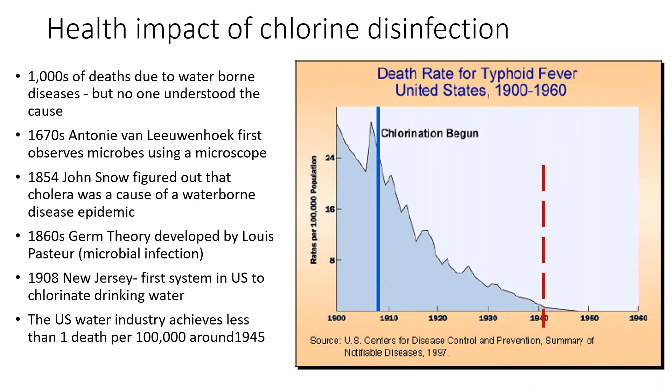In the 1860s, Louis Pasteur developed the germ theory, and that theory was that microorganisms such as bacteria and viruses are the primary causes of disease. And then in 1908, New Jersey installed the first system in the U.S. to chlorinate drinking water. So if we look at our chart here, in 1908 we were over 20, probably 25, 26 deaths per 100,000 people. And then you can see the decline in the years after that. In 1945, we achieved less than 1 death per 100,000 people. So it's important. Disinfection, chlorination, very important stuff in the water industry.

So when we look at the different bugs out there, the microorganisms, we consider them pathogens, and pathogens are disease-causing microorganisms: bacteria, viruses, parasites, things like that. They can contaminate our water supplies, and they make people sick and possibly even kill them. So that's why we need to disinfect and chlorinate.

We'll talk about coliform, and coliform is the total coliform testing that we do initially in our distribution system and at our plants. That's an indicator organism. Just because we have those doesn't mean that we have E. coli or fecal coliform, the things that are really dangerous. It doesn't necessarily mean that, but it means that we have an environment that is capable of sustaining that type of life.

So the presence of coliform may indicate that contamination has entered the water. It could be different things. It could be bacteria, viruses, protozoa. And E. coli is an MCL, a maximum contaminant level. There are violations for that under the revised total coliform rule.

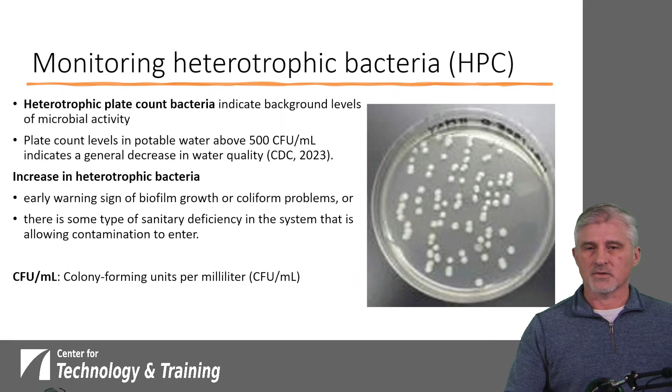And what could cause an increase in heterotrophic bacteria, or what does that increase signify? It could be an early warning sign that there is a problem out there. Could be biofilm growth. You would probably also want to look into it further as far as coliforms. Maybe there's something out in your distribution system or in your treatment that is allowing that contamination to enter, and so it signifies that maybe we need to look a little further into this as a potential problem.

And so what can we do as distribution system operators to protect our distribution system? The two most important things that we can do are maintain a positive water pressure. If we maintain positive water pressure, as Greg talked about, the opportunity for backflow or back siphonage is much less. And also, maintaining the physical integrity of the distribution system. If we don't have broken pipes, if we don't have leaks, once again, that helps with making sure that our distribution system is protected.

And then having a free chlorine residual, it's kind of a safety thing. It's a backup. It allows us to have a little bit of reassurance that if something like this were to happen in our system, hopefully that chlorine could act on any of the contaminated water that might enter through a hole in the pipe. But that's only going to take us so far. At some point, we'll use that chlorine up and we won't have any additional backup or safety remaining.

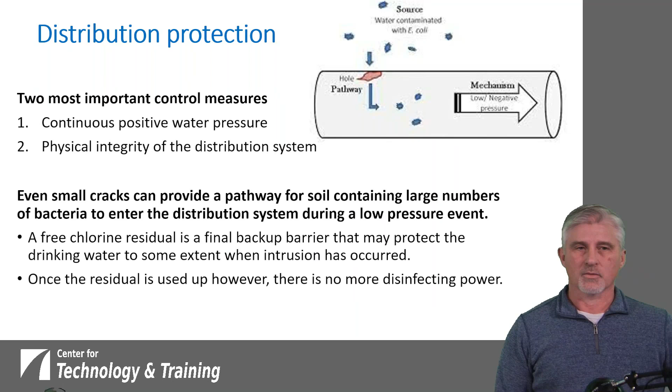All right, so we're into our first poll already. Which of the following could indicate that contamination may have entered the drinking water system? A, increase in heterotrophic plate count bacteria. B, the presence of coliform bacteria. C, decrease in disinfection residual. Or D, all of the above.

All right, it looks like the majority of people have gotten their answers in, but I'll give everyone just a couple more seconds to get those answers in before I close the poll. All right, closing the poll in 3, 2, 1. All right, Daryl, so the majority of people at 88% said D, all of the above. All right, thank you, Kristen.

Yes, D, all of the above is the correct answer. We can explain that through A and B, the increase in HPC count and the presence of coliform bacteria. We indicated that both of those things are indicators of potential issues in the distribution system in the water. And then a decrease in disinfection residual could mean that our chlorine is working on some bugs that were introduced into the system. So all of the above would be the correct answer.

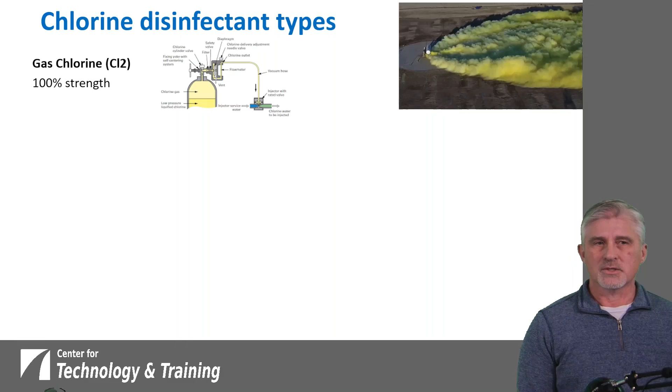There are some issues with chlorine gas. It can be very dangerous. You see here a chlorine gas plume. Everything around there will be dead. Chlorine is a powerful oxidizer, and anything organic is going to be pretty much killed.

So one of the reasons that more systems don't use that is because there's a bunch of regulations that are involved with operating gas chlorine. It's a safety thing. Some communities don't even want to consider it. So it's a great way to chlorinate, but it comes with its downsides.

Liquid chlorine or sodium hypochlorite is probably the most common. It's the simplest. It's already in a liquid form. We're trying to add this to water, so it already is in a liquid, so it's easy to mix. But you'll note that the concentrations are lower. The concentrations will decrease through time a little faster than they will for gas, or for the solid, which is

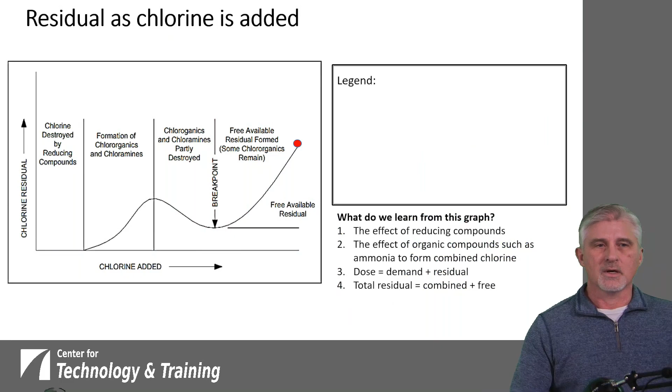So as we go along, on the bottom we're adding chlorine, and on the side we're seeing what the result is in chlorine residual. So initially, if we're starting out and we're adding chlorine at a well, say, and we're looking for what our residuals are, initially we're going to add chlorine and we're not going to really see anything. The chlorine is destroyed by reducing compounds that are in the water initially. So we'll add chlorine and nothing seems to happen as far as the residual goes.

And then as we continue to add, we start to see this curve and it goes up. And during that, we're forming chlororganics and chloramines. And these are the things that give us the odors, the chlorine odor. Taste and odor concerns come out of this. And so we're adding chlorine and we're just getting more of the stuff we don't want. And so we get complaints. And so as a state regulator, I would go out to systems and I'd tell them, you need to increase your chlorine residual.

And they'd be like, well, you know, we do that and we just get more complaints. And so they're hesitant to do that. But the part that they weren't understanding is that we need to keep that process going. And so as we get through that, we produce those chloramines, and then we get to the next stage where that chlorine is going to destroy those chloramines. And so we see a drop in our chlorine residual as we continue to add chlorine.

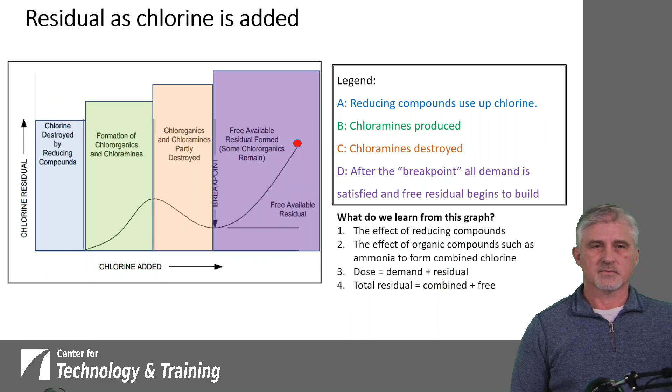So that kind of is a little better depicted here. Total residual is equal to the free residual and the combined. All right, so in this instance, we have 0.2 parts per million. That's what it takes for the chlorine to use up those reducing compounds in this example. And then on top of that, we have 0.3 parts per million of combined chlorine. And so those two together result in a half a part per million of total demand.

And then in this instance, we might have another 1 part per million of free chlorine residual on top of that. And so our chlorine dosage, in order to achieve 1 part per million, we need to apply 1.5 parts per million to get to that point, because 0.2 is used up by reducing compounds, 0.3 is combined. So that requires 1.5 to get to our free chlorine residual goal of 1 part per million. So our dosage is equal to the free residual plus the demand. Now the demand is made up of both what's used for the reducing compound and the combined chlorine.

So now we are on to poll number 2. What dosage should be applied to drinking water with a total demand of 0.4 parts per million if the intended free residual is 1.2 parts per million?

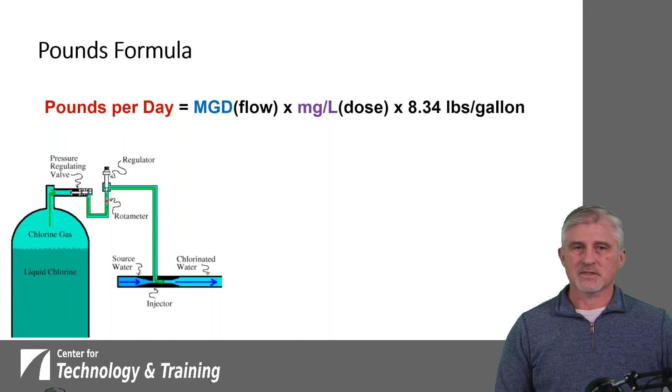And this shows what gas chlorine might look like, some of the components. This is the rotameter here. And the rotameter provides us units in pounds per day. So this is a setting. So we need to know how many pounds we need in order to set this rotameter so that it applies the right amount. So we need to figure that out. So we use the pounds formula to do that.

So we've got an example where the question is, what is the feed rate setting for gas chlorine in pounds per day if the plant flow is 1.2 million gallons a day and the required dosage concentration is 1.5 parts per million?

So to solve this, we're gonna plug that 1.2 mgd in for the flow, and then we'll take the concentration of 1.5 parts per million, and we're gonna put them into our equation for our pounds formula. If we do that, it tells us that it's going to take 15 pounds per day for us to have a dosage of 1.5 parts per million with our flow of 1.2 million gallons a day.

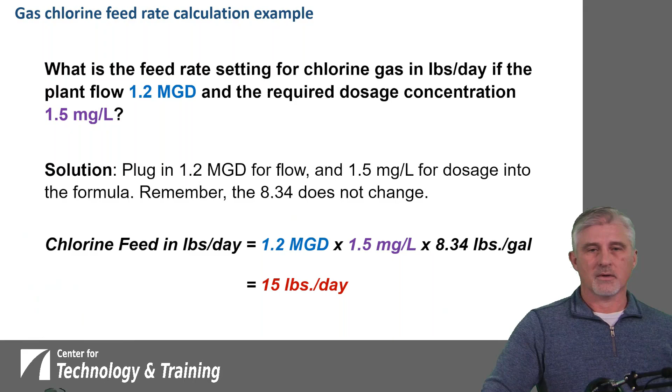Now for sodium hypochlorite, for liquid chlorine, it's a little different. It's different because the concentration isn't 100%. For gas chlorine, it's a much simpler calculation because we're using 100% strength. So we have to take into consideration for liquid chlorine the fact that it isn't 100%. The top part of the equation is just determining the pure chlorine, just as if it were gas chlorine.

Now we'll divide by the percent strength to take that into account, and that gives us the weight of sodium hypochlorite liquid actually needed. And then we also need to divide by the weight per gallon, and that's going to give us the number of gallons that we need per day. We could do it in pounds. Some people operate in pounds because then they have scales and they can do it that way, but most people are going to want to know how many gallons of liquid chlorine they need to apply. So that's what we put into the formula in order to take that into account.

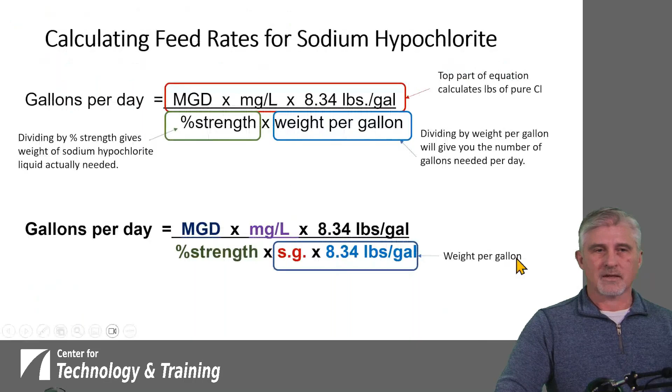So then our formula becomes the gallons per day is equal to the million gallons a day times the concentration times 8.34 pounds per gallon. And then we divide by that percent strength, and we multiply by the specific gravity. So the specific gravity is the comparison of a liquid to the weight of water. So we compare those two, and then we multiply that by 8.34 pounds per gallon. So that gives us the weight per gallon there. So let's look at an example of that and use our formula.

What is the feed rate for 12.5% sodium hypochlorite with a specific gravity of 1.2 when the plant flow is 500,000 gallons a day and the dosage is 0.9 parts per million? Now keep in mind, specific gravity is a comparison to water. So water is 1. If it has a specific gravity of 1.2, that means that liquid chlorine is heavier than water. If it was less than 1, it would mean that it was lighter than water.

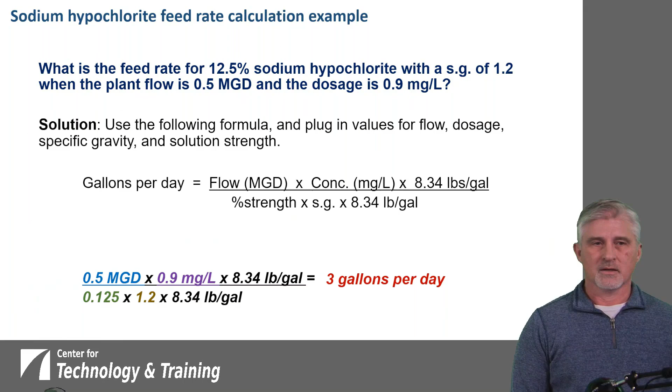So for our solution, we're gonna use the formula. We're gonna plug in those values, and we'll see what we get here. So our formula is gallons per day is equal to the flow times the concentration times 8.34 pounds per gallon, divided by the percent strength times the specific gravity times 8.34 pounds per gallon. So if we put that in, we've got a 500,000 gallon a day flow, 9/10 of a part per million concentration, and we've got our percent strength. We're going to convert that percent into a decimal, so that becomes 0.125. Our specific gravity is 1.2. So if we multiply that out, we get around 3 gallons per day. So we would need about 3 gallons a day in order to make that the concentration based on our flows and our chlorine.

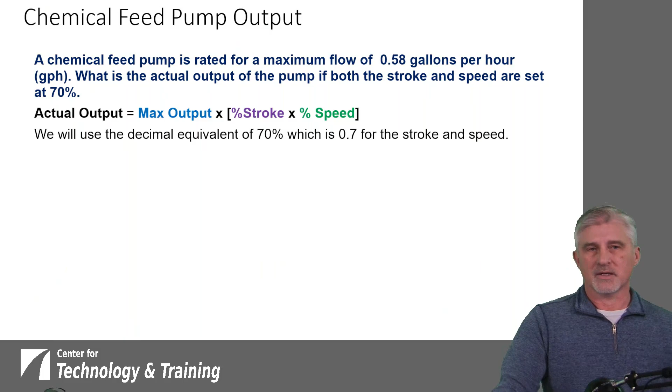So if we want to look at what kind of output our pump's going to have: a chemical feed pump is rated for a maximum flow of 0.58 gallons per hour. What is the actual output of the pump if both the stroke and the speed are set at 70%? So the actual output is going to be equal to the max output multiplied by the percent stroke and the percent speed. Our percent stroke and our percent speed are both 70%, so we're going to use 0.7 in each of those. So we'll take our 0.58 gallons per hour and multiply that by 0.7 for our speed and 0.7 for our stroke, and that gives us 0.284 gallons per hour. So that's how much at 70% speed and 70% stroke that we would be able to pump from that pump. And that's a pretty good set point for our pump.

I mean, if we were to design a pump, it's great to be about half of day to day, about half of what we need. That way we have room to move that pump up or down depending on the conditions we might find or the flows that we're using. So that 0.284 is about half of the 0.58 that the pump is capable of producing.

Now, if we want to know how many gallons we can put out in a day, we could just take that 0.284 gallons per hour times 24 hours a day. That tells us that at our 70% stroke and 70% speed with this pump, we'd be putting out about 6.82 gallons per day of chemical.

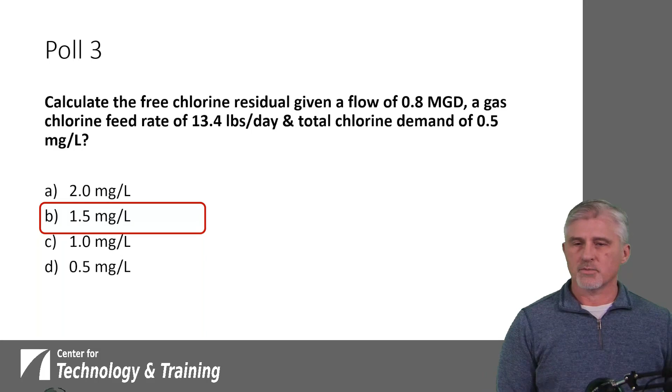And how do we come up with that? The first thing we do is solve for the dose. We take our 13.4 pounds per day and divide it by our 0.8 mgd times 8.34. That tells us our dose is going to be about 2 parts per million. That's how much we're aiming to apply. And then the residual is going to be the dose minus the demand. If our dose is 2 parts per million and our demand is a half part per million, we subtract the demand from the dose, and that tells us our residual should be 1.5 parts per million.

All right, so we've talked about these different pathogens, and one of the interesting things is that when we're disinfecting, with the viruses and the protozoa, we don't necessarily look to kill them. Sometimes that's not possible, but if we can render them useless so that they can't replicate or reproduce, then we've done our job. Typically with bacteria, we actually do kill them, but with viruses and protozoa, we're happy if we can just inactivate them. If they can't reproduce, they can't cause any more problems.

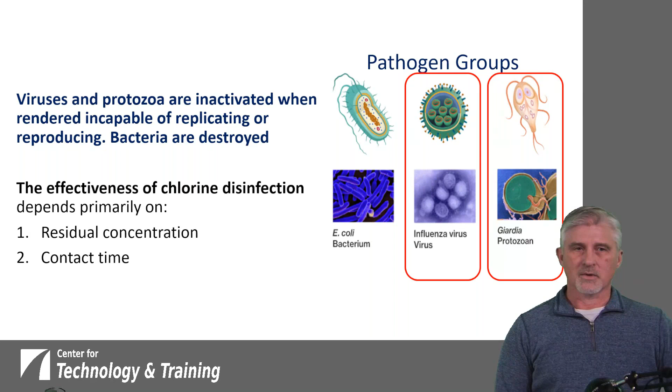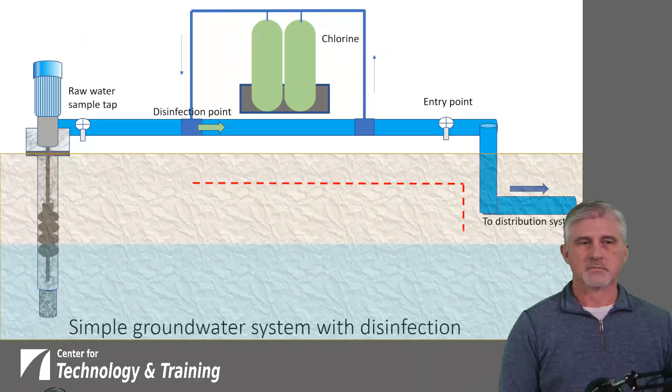So if we look at this simple groundwater system where we're disinfecting, where the disinfection point is here, chlorine disinfects here. Where we're talking about having to meet that requirement is before it gets to our first customer out here in the distribution system. So that's where our CT is determined from this point of disinfection. That's the time until it gets to that first customer. So that's the time component.

Concentration we can figure out based off of our residuals that we collect. So we'll do an example problem here to determine the CT at the first connection. So we've got a groundwater system. Their requirement from the 4-log removal table is a CT value of 6 milligram-minute per liter at the first service connection. All right, so we know there's 500 feet of 8-inch pipe between the disinfection point in our well house and that first connection, and the flow is 250 gallons per minute. The free chlorine residual is 1.5 parts per million.

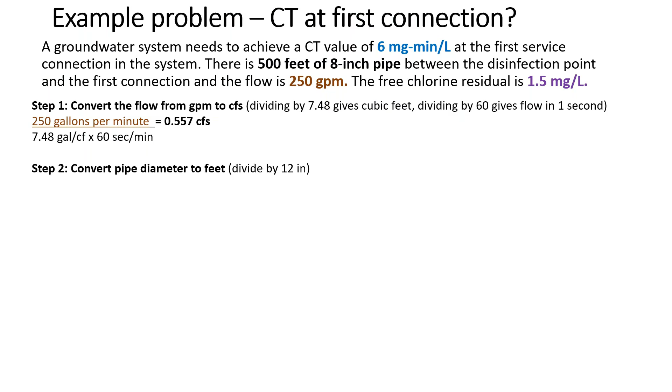All right, so this is a multi-step problem. The first thing that we want to do is convert the flow from gallons per minute to cubic feet per second. So dividing by 7.48 gives us the cubic feet, and then dividing by 60 gives the flow in seconds. So the minutes will cancel out, the gallons will cancel out, and we end up with 0.557 cubic feet per second. And that's important because our pipe is in feet and inches, so getting that from gallons to feet helps. So the next step, we're going to convert the pipe diameter from inches to feet. We divide by 12, so an 8-inch pipe is 0.67 feet in diameter.

And next we find the area. So if we take 0.785 times that 0.67 times 0.67, that gives us 0.35 square feet. So that's the cross-sectional area of our 8-inch pipe. Next thing we're going to do is divide the flow in CFS by that area that we just found so that we can get velocity. So we're going back to some of that basic math that we did yesterday when we do this problem. So we're going to divide our 0.557 cubic feet per second by the area, and that's going to give us our velocity. In this case, the velocity of that flow is 1.59 feet per second.

Now we're going to take into consideration the 500 feet of pipe. So we're going to divide the linear foot of the pipe by the velocity to find the total contact time. So we had 500 foot of pipe and the velocity is 1.59 feet per second. That tells us that we've got about 314.5 seconds worth of contact time in that pipe, or the time that that water or that chlorine's in contact with it. And then it equals out to about 5.24 minutes if we divide the number of seconds by 60 seconds in a minute.

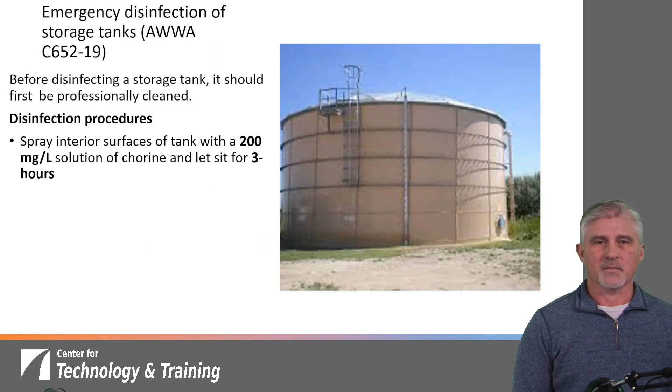And then there's other AWWA standards that are out there for different types of disinfecting. We could be disinfecting a storage tank. When you do that, you want to make sure that it's cleaned properly first, power washed and drained out. In this case, they're looking at 200 parts per million of chlorine and letting it sit for 3 hours. Rinse tank walls and drain it out. Dechlorinate that rinse water to make sure that we're not killing anything as we discharge it. And then you want to refill the tank and take bacteria samples.

And the same thing if you're repairing or installing new main, replacing old main, you definitely want to collect the proper number of bacteria samples before, and the results coming back good before they're put into service.

The same thing goes if we're trying to disinfect a well. Sometimes we've got a well driller and they do some work on a well, or maybe you're getting positive bacteria from a well, from the source. You may want to do some chlorinating, and this is generally how you might go through it.

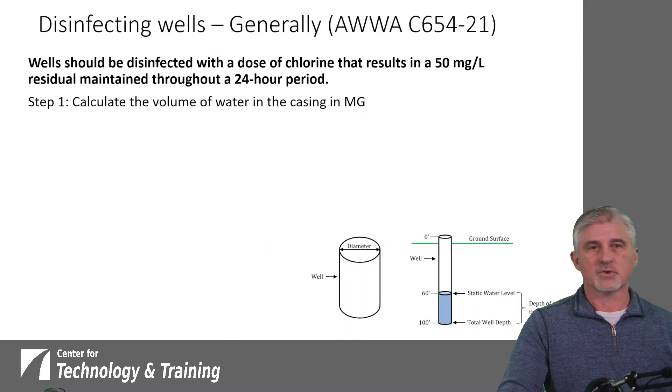Wells should be disinfected with a dose of chlorine that results in 50 parts per million residual throughout a 24-hour period. Obviously, you don't want to just take that well that's in the water and pump it to the distribution system at those high levels. You need to calculate the volume of the water that's in the casing so that you know how much chlorine you're going to add. And then afterwards, we're going to dechlorinate and flush that water out. You also need to collect negative bacteria samples to make sure that it's safe.

And anytime you go through a process like this, I would recommend that you talk to your regulating agency, whether it's the state, if it's EPA, whoever that might be. They can help guide you through the process and make sure that what you're doing is correct.

I'll hold off on a little bit before I launch the poll as well, Daryl. Okay. All right, I'm going to go ahead and launch the poll now. Okay, just over half of folks have voted, so I'll give everyone just a little bit more time. All right, we're at 90% of people that have put in their answers. So I'm going to go ahead and close the poll in 3, 2, 1.

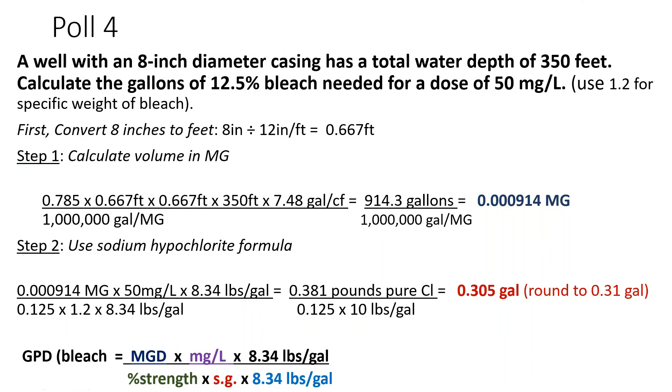A little hint here is that liquid chlorine at 1.2 specific gravity can change based off the concentration a little bit. If the concentration is a little lower, maybe the number's lower, but when you multiply the 1.2 specific gravity times the weight of water, it's roughly 10. So a good rule of thumb is that 12.5% chlorine is about 10 pounds per gallon. So we go through this calculation, we come up with 0.305 gallons, and we round that up to 0.31.

All right. So the next topic that we're going to talk about is disinfection byproducts. We've been adding this chlorine to the water, and unfortunately, there's a downside to that. Chlorine is very important. We need to do it, but we also have to take into account the effects that it can have. So what are disinfection byproducts and how do they form?

But the downside is when we add chlorine, that chlorine will react with those organics that are naturally in the water. It'll form these disinfection byproducts. Okay, and so the disinfection byproducts go out into the system. We'll talk in further detail about them, but it can be harmful, and so it's regulated. There are maximum contaminant levels for those.

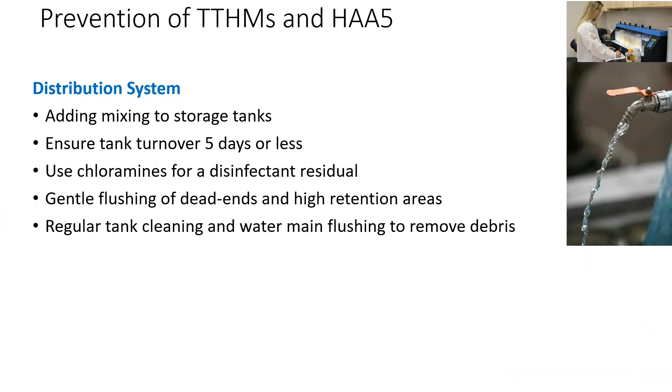You could use chloramines as a disinfectant residual. As we said, they've got their own set of concerns too, but it may work for your situation individually. If you've got concerns with THMs and HAAs, you may want to look at chloramines. We can flush our dead ends in areas where we don't use a lot of water. That can help because we're getting fresh water into those areas. We're taking out the water that maybe has sat there longer and has the potential to have formed these. And then if we can clean our tanks out and flush our mains to make sure there's no sediment or debris in those, that can also help minimize the formation of these.

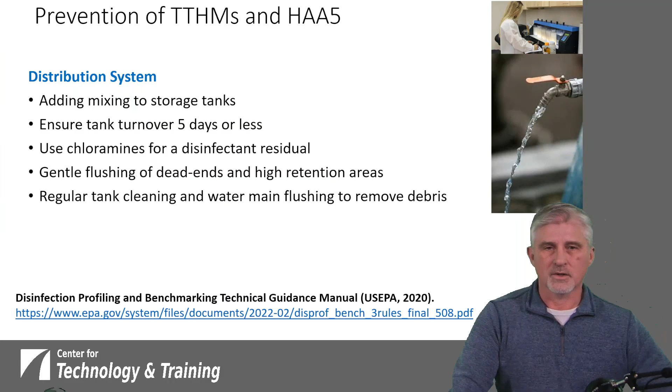And at the bottom of the screen, there's a link to EPA guidance documents. Those are very helpful when it comes to understanding these rules. I'd encourage you all to look at these as they come out. We've got several of them on these. We've had them on the slides.

So water age, we talked about the idea that you want to turn tanks over and things like that. Well, water age is the amount of days or hours that water is in the system. So to keep fresh water in the system, we want to minimize that water age.

Where can we find that older water? Large diameter mains. They hold a lot of water. And if you don't have high flows, that water will sit in those mains. You've got areas where you don't have high usage. Maybe you did in the past, maybe an industry, and they went out and now the water just sits there.

Dead ends are another opportunity, because if you have a dead end, the only place to use the water is at that end. And then you can have seasonal usage that can affect it, maybe you're a community that has a lot of tourism in the summer but nothing in the winter. You get low usage in the winter. And then short circuiting we'll talk more about, but quite often we see that in tanks.

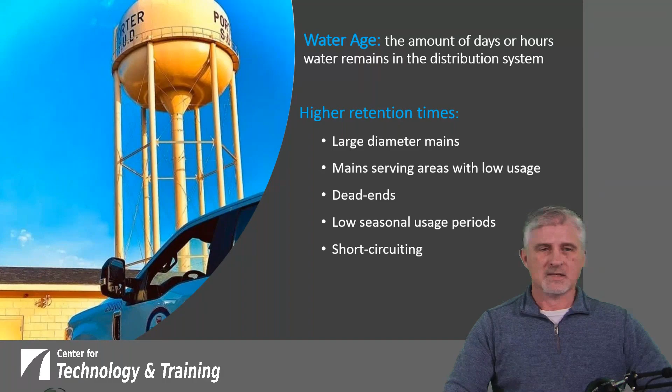Now nitrification is something that comes up. It's a microbial process when the ammonia oxidizing bacteria convert ammonia into nitrite, and then that is oxidized to nitrate by nitrite oxidizing bacteria. So there's a two-step process. Both nitrates and nitrites are regulated by EPA, and they're not good. They can cause what's called blue baby syndrome in young infants. So we don't want that to happen. Nitrification can cause high nitrate levels. We can see a loss of disinfection residual when we have nitrification, and we can have bacterial growth because nitrate is a food.

So what can cause nitrification? I said chloramines might be an option, but use of chloramines can also lead to nitrification. So there's no silver bullet in any of these things. It takes a good deal of consideration. Ammonia is a food source for bacteria. It's going to allow the bacteria to grow because it's got food. Warmer temperatures can also lead to nitrification. If you've got sediments in your distribution system, whether in your tanks or your mains, they can harbor bacteria. If you've seen a significant drop in pH and alkalinity, that can also lead to nitrification.

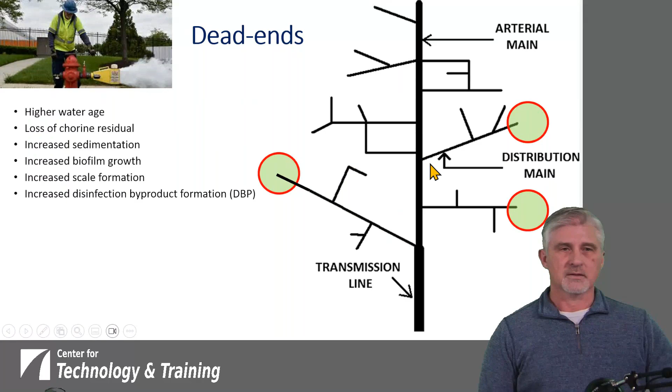Dead ends are not good because we see things like higher water age. Our chlorine residuals will drop. We can't maintain good chlorine residuals. Our sediments will build up because there are low flows in dead ends, and so any sediments are allowed to drop out into the mains. Accumulation of sediment can allow places for bacteria to grow, or biofilm. Stagnant water can lead to the formation of scales, and then these disinfection byproducts. As we said, it's a factor of how much time the water's out there and the chlorine has to react with these organics.

There was a study done that found that distribution systems with dead ends and chlorine residuals less than 0.2 parts per million, or chloramine levels less than 0.5 parts per million, had substantially more coliform occurrences system-wide than systems maintaining a higher residual. It's difficult without flushing. You could flush these dead ends, but it's difficult to avoid low chlorine residuals in dead ends without doing something like that.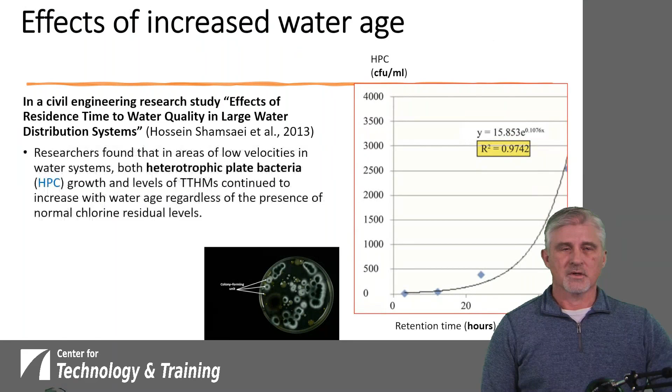And there's another study that was done, the effects of residence time on water quality in large water distribution systems. They found that the longer the water was out there, with low velocities, you'd see an increase in both the HPC, heterotrophic plate count growth, and the levels of THM when we had increased water age. And that didn't matter, regardless of how much the chlorine residual levels were.

And so the HPC estimates the number of bacteria, yeasts, and molds out there as well. So it considers stuff beyond our typical pathogens. Chlorine residuals decreased with water age. As we see here, the HPC counts go up as we go out, and typically chlorine residuals are going to drop through time. It's just the normal way that it operates.

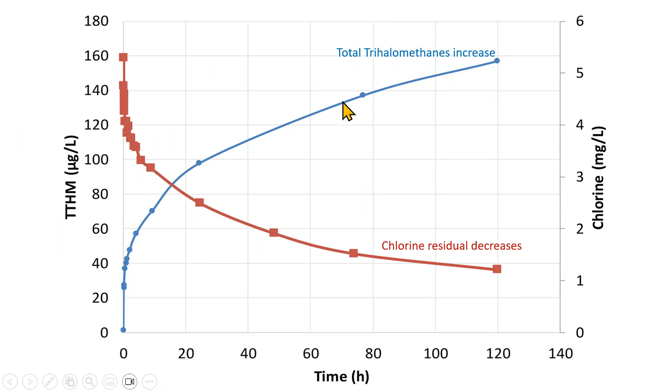This graphic shows through time, where time is on the bottom, and chlorine residuals and THMs are on the sides. As the chlorine residual drops through time, the TTHMs increase. So that's just the normal way that things operate.

And then storage tank turnover. The idea is that we want to get fresh water into our tanks. We want to use the oldest water that's in there and just move it through. That helps with a lot of these things. It helps keep our residuals up, and it helps to avoid formation of disinfection byproducts. So ideally, we want to make sure that the tank's turned over in less than 5 days. The idea is that the water that comes in today will be out of the tank within 5 days.

But it's a balancing act, because we want to make sure that we have enough. If we've got an elevated storage tank and we're using that for fire flow, to satisfy our peak flows, we want to have a lot of storage. But we also don't want so much storage that we can't get this turnover. So if we look at a 500,000 gallon storage tank with an average flow of 175,000 gallons a day, we can easily determine the turnover of our tank. This assumes that the oldest water leaves first, and we'll look at mixing and things like that. It's not always necessarily the case, but in the simplest form,

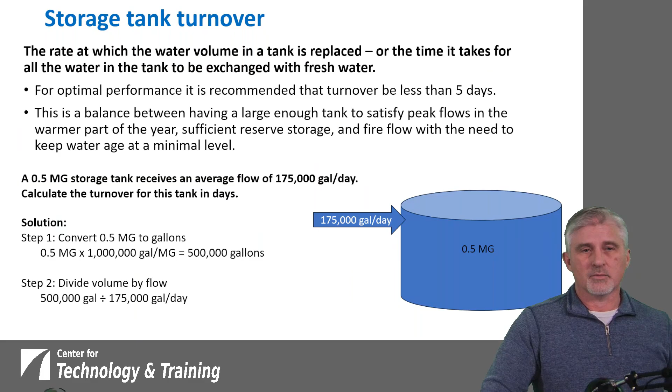to figure this out, we're going to convert that 0.5 MG to gallons. We end up with 500,000 gallons. Then we divide the volume by the flow. So we take our 500,000 gallons and divide by 175,000 gallons a day, and we come up with 2.86 days. So obviously that's less than 5 days. That is also assuming that the first water in is the first water out, and the last water in is the last water out.

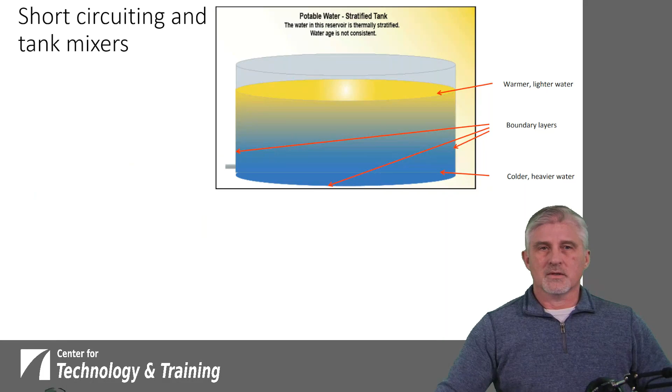So I've talked a couple of times now about the idea of short circuiting and tank mixers, and so the concept is here. As we see, for instance, we've got warmer, lighter water on the top of a tank, and colder, heavier, denser water at the bottom. In this instance, if we put the water in at the top, it's going to drop down to the bottom, and that cold bottom water is going to be the stuff that leaves first. So we end up with warm water that stays in the tank because it's lighter and doesn't mix together. So we're short circuiting this tank.

We can fix that in a couple of different ways. In this instance, we've got a mixer in the tank, and we're basically pushing that water around. We're getting it so that it's all very similar. The other thing in this one, it's an air. We're adding air to the tank, and that's pushing the water around, bubbling. And so we can use methods like that.

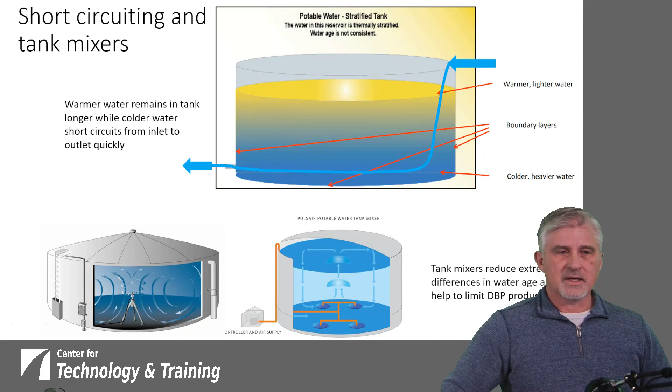The other thing we could do is we could have baffles, so we can have things in the tank that force the water to go in a certain direction instead of just in the tank, down and out. There's a few different things that we can do. But tank mixers, they kind of homogenize that water. It's going to be all very similar, and it limits the disinfection byproduct formation.

So what are the effects of disinfection on biofilm in relationship to DBPs? So as we see here, chlorine can reduce the biofilm growth rate. Sometimes it'll even destroy those biofilms. However, as we said, chlorine produces disinfection byproducts. And so these biofilms out in the distribution system can be another source of these organics that can cause DBPs.

In a recent study, low disinfection byproduct formation was observed with a chlorine residual of 0.5 parts per million. When the residuals were increased to 2 parts per million, however, disinfection byproduct concentrations increased sharply and then decreased after 2 weeks. So what might have happened in that situation?

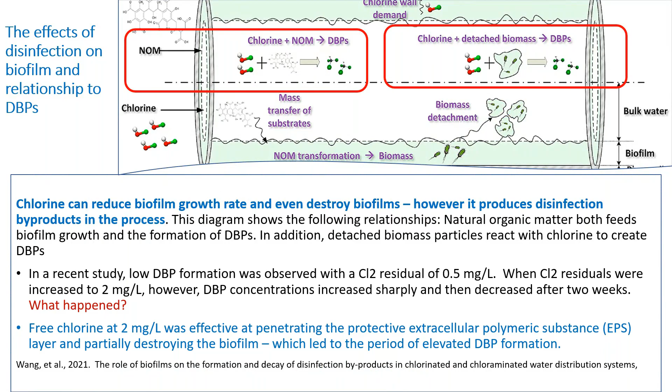So with the free chlorine at 2 parts per million, it was effective at penetrating this protective extracellular polymeric substance layer. So these biofilms have this layer on the outside, and the 2 parts per million was able to get through that biofilm, which initially led to an increase in the DBP formation, but it also killed off a lot of the biomass, and so long term we saw a reduction in the biofilms.

So the pipe material that we have can also have an effect on our biofilms. In PVC water mains, chlorine achieves greater levels of inactivation in biofilms than chloramine. A concentration of 1 part per million of either free chlorine or chloramine has been shown to reduce HPC counts and coliform by more than 2 log in biofilms.

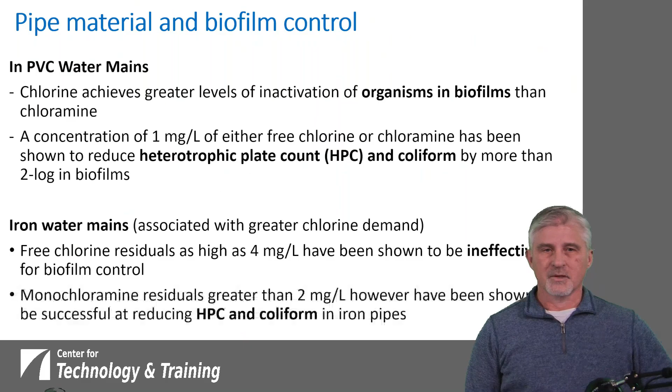Now, iron water mains are a little different because we often see a greater chlorine demand associated with iron water mains, and free chlorine residuals in iron water mains as high as 4 parts per million have been shown to be ineffective. So even at high levels, they can be ineffective. And then monochloramine residuals greater than 2 parts per million, however, have been shown to be successful in iron water mains at reducing HPC and coliform. So depending on what type of water mains you have, you may have to use different methods in order to achieve what you're looking to do.

There's several studies that have been done regarding these, and in general, free chlorine followed by chloramines is the most effective strategy to reduce those biofilms. And then if you're looking at what effect flushing could have, the idea that you flush first and then you disinfect afterwards is deemed to be more effective in dealing with biofilms.

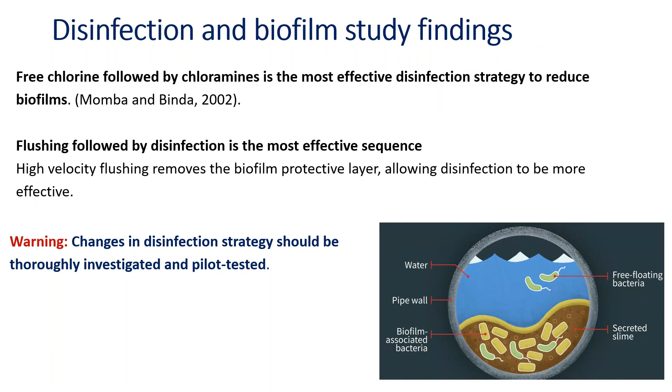But one of the important things is that you shouldn't just go out there and change your disinfection strategy without studying it, potentially pilot testing it. And definitely, if you're going to do something where you significantly change your disinfection strategy, I would recommend that you talk to your primacy agency. Some of these changes could require a permit, and you would definitely not want to do something without getting the proper permitting. And then once again, we've got an EPA technical guidance manual that helps with disinfection profiling and benchmarking.

So now we're going to talk about sanitary surveys. And as I said, I spent a little over 20 years with the state regulatory agency for drinking water, and so conducted some sanitary surveys. And I know that can cause some angst with operators, and hopefully that's not the situation you have with your regulatory agency where they're out to get you. I think in general the whole idea is that we try to work together to avoid problems.

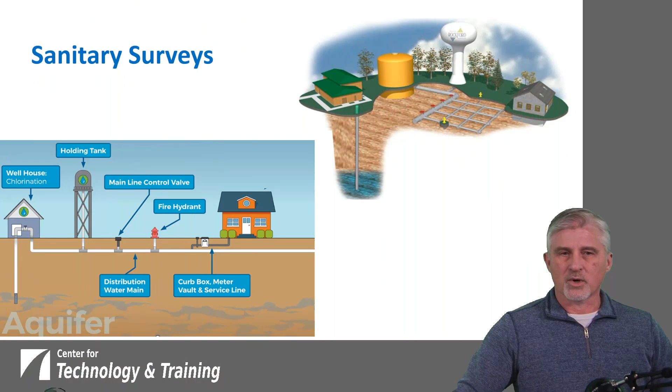And so we'll just talk about some of the things that you might expect with a sanitary survey. They're conducted by the primacy agency, and I've always deemed them not to be, "we're going to come out and get you." It's working together. We're going to identify what risks might be out there, because we want to make sure that the system's operating properly and that people are receiving safe drinking water. We want to make sure the systems have the capacity to do that, and it's an opportunity for regulators to get to know the operators and vice versa, and if there are any opportunities where we can educate or provide assistance, then that's what we want to do.

A sanitary survey is an on-site inspection of a water system infrastructure, and it includes the review of plans, budgets, records, all sorts of different things. Now, why do regulating agencies do this? The primacy agencies do it because it's required under the Safe Drinking Water Act. From a surface water treatment standpoint, there's a rule for that, and then also the groundwater rule. Both of those require that they're done. Community water systems are required every 3 years, and the non-community public water supplies every 5 years.

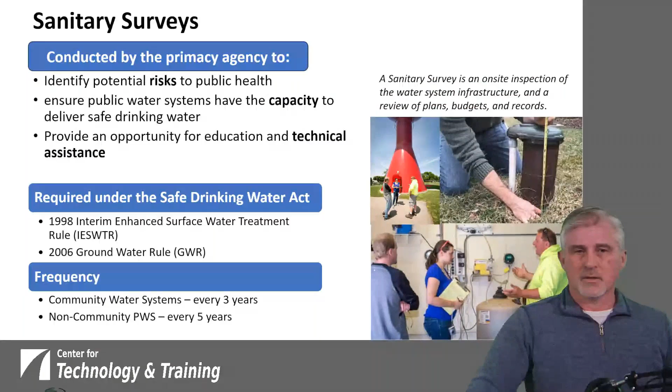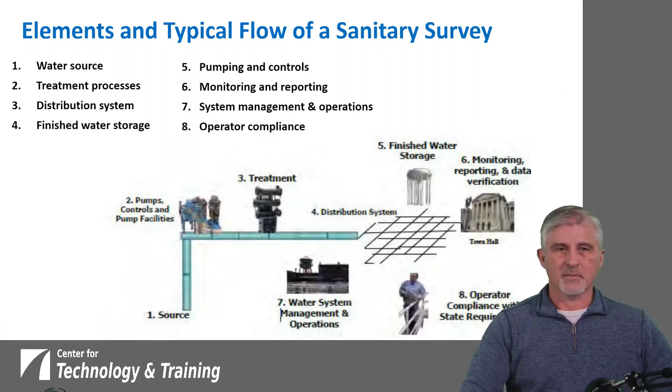So we'll just go through some of the elements of a sanitary survey. We'll look at water source, the different treatment processes that you utilize, what your distribution system looks like, your finished water storage facilities, your pumps and controls. Are you doing the required monitoring? Are you reporting on time and properly? How's your system operated and managed? And then do your operators have proper certification? So we go from source all the way through the distribution system, including some of these other components that make up those.

So the process, what's going to happen? Typically before the survey starts, you will be notified. So you're going to get together all the records that the primacy agency may want to see, and you can expect that they're going to want to see a tour of not just a treatment facility if you have that, but also your distribution system, pump stations, the storage tank, stuff like that. And then afterwards, they're going to provide you with information about their findings, good, bad, indifferent. They're going to talk about any sanitary deficiencies, and if you have any of those, they should give you a timeline to correct those.

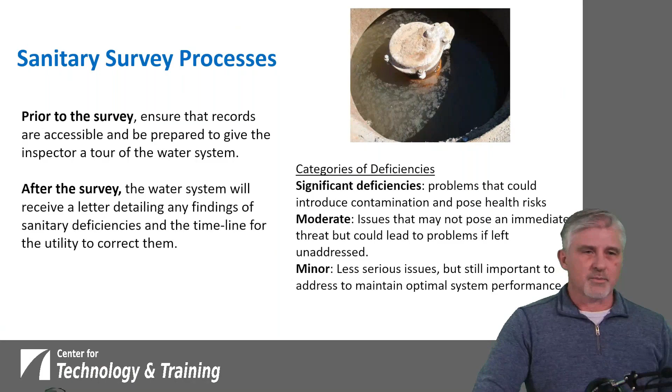There are 3 different categories of deficiencies. Significant ones are the most important, the ones that could cause public health concerns or contamination. And then there's the moderate, which may not be immediate concerns, but could result in a significant deficiency if not addressed. And then there's the minor. Those are less serious, and quite often these could be operational things that help the system operate more efficiently and perform better. So we've got poll number 6.

Which of the following do you think best describes a sanitary survey? A, where operators inspect and flush the distribution system. B, a survey to the public asking about drinking water quality. C, system inspection and review by the primacy agency under the Safe Drinking Water Act. D, review of community sanitary waste disposal under the Clean Water Act. Or E, none of the above.

All right, this one was answered pretty quickly, but I'll give everyone just a couple more seconds to get your answers in. Closing the poll in 3, 2, 1. All right, Daryl. The majority of people, nearly three-quarters, said C, system inspection and review by the primacy agency under the SDWA. And around 20% of people said E, none of the above. Well, the answer is C, system inspection and review by the primacy agency under the Safe Drinking Water Act.

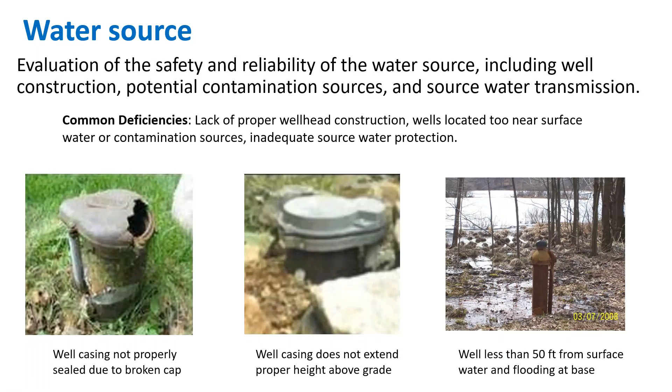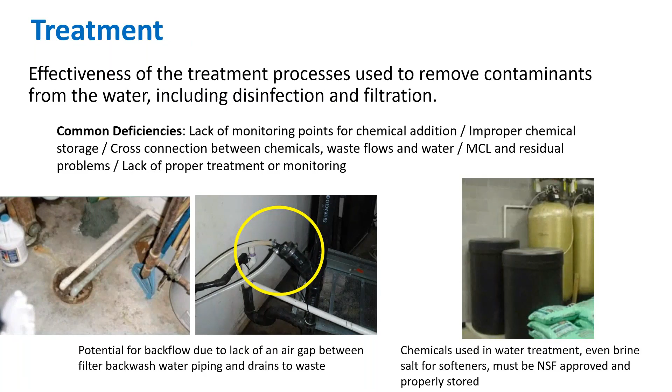And there's a lot of little things that we can look at with treatment when we come out and do these sanitary surveys that an operator who's looked at this for years might not notice because it's just normal to them. Another thing that is potentially a concern I've seen issues with is delivery of chemicals to a treatment plant where the chemicals are piped right in through the side of the wall and they get the wrong chemical. You could have, you know, chlorine put into an alum line or something like that. So there's a lot of little things that we can see just because we're looking from a different set of eyes when we come to look at a sanitary survey.

The distribution system, there's a lot of components, a lot of things in the distribution system we can't see. So quite often we'll look at the things that we can. We'll look at records, we may look at the pump houses and the pumps and the storage tanks and things like that. And generally, do you have a good cross connection program? Are you exercising valves? Are you maintaining and flushing hydrants?

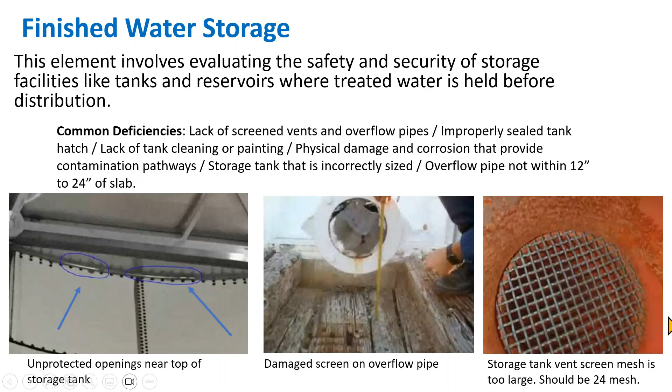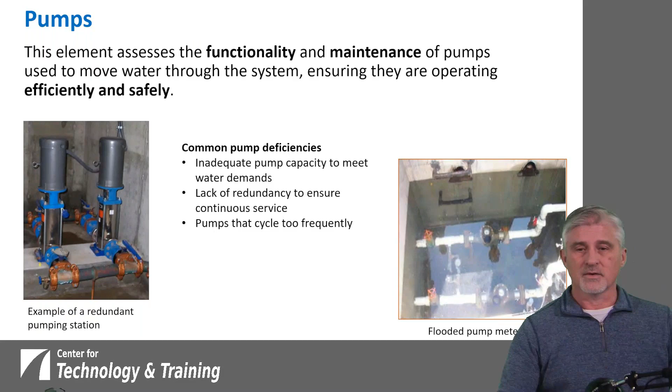On the right, we've got a flooded pump meter pit. That's not a good situation because most of the meters are typically not set up to be underwater. So if you don't have pump capacity, you don't have redundancy, or if your pumps cycle too frequently, then that could be a sign of an issue. Either maybe you don't have enough capacity, or maybe there's an issue with a check valve, maybe the pump's going on you. Screening for pumps, if you've got histories of outages or low pressures.

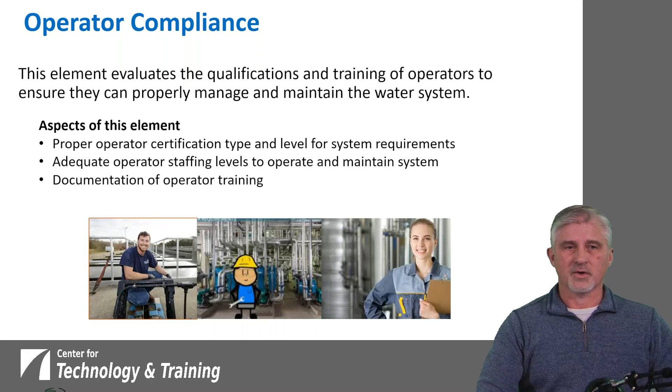And then we're going to look into the operator compliance. Do your operators have the proper licenses? Are they qualified? Do they receive proper training to maintain their licenses? Do they know what it takes to operate and maintain the water system? So proper operator certification and type and level for the system. Some states require different types of levels or different types of certifications based off what you're doing, along with levels based off of the size of your community, population, or how much you treat, things like that. So do you have enough people to operate the system? And then you should have documentation of that.

If you're doing training, you should be able to document that your operators are being trained. So management and operations, we're going to look at the overall management and operation practices of the water system. Are you planning for any future financial needs? Do you have a capital improvement plan? Do you keep records on all your stuff? Are you planning for those contingencies? What might happen in the future? And some of the aspects of that are your policies and your ordinances. Ordinances can help a system do what they need to do. If you don't have a good ordinance, you may not be able to have a good cross-connection control program or something like that.

How's your system managed? In a lot of cases, the money that goes to the water system should stay with the water system and not be used for other things. What's your system area? Who do you serve? You need to know those things. Are you planning for asset management? Do you have emergency response planning? If something comes up, do your operators know what to do in a case of an emergency? Is it all outlined in a plan?

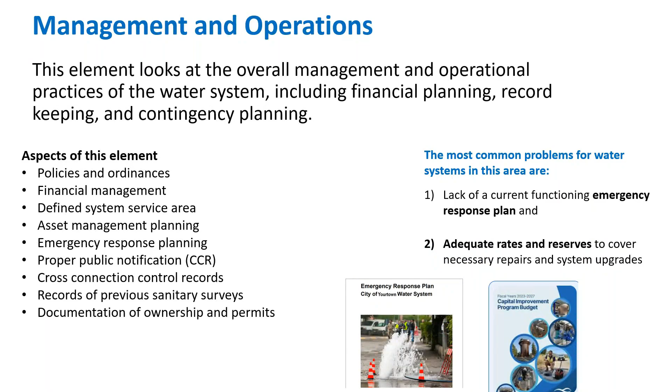And the most common problems that water systems have is a lack of a current functioning environmental or emergency response plan. Quite often what happens with emergency response plans is they get created and then they never get touched again. Nobody updates them. If you've got a contractor that you use and that contractor goes out of business, quite often the plan is not updated and replaced. Operators retire, they move on. And the other thing is having enough income, having the rates set up so that you're able to do what you need to do. You're able to plan for capital improvements, make necessary repairs to your system and upgrades and things like that.

So I mentioned a little bit about keeping the reporting and monitoring up to date. So we're going to look at a lot of this stuff. I think the monitoring reporting gets reported throughout the year, based off my understanding and experiences. It's not something that you would probably be surprised by at a sanitary survey, because the primacy agency is probably going to let you know if you're not providing them with the information that they need. But they'll look at your practices, your sampling plan, whether it's your bacteriological site sampling plan, your disinfection byproduct plan.

How are your laboratory procedures? If you're doing in-house laboratory work, are you using a certified laboratory if you're required to for external work? Are you measuring your chlorine residuals when you're collecting your bacteriological samples, things like that?

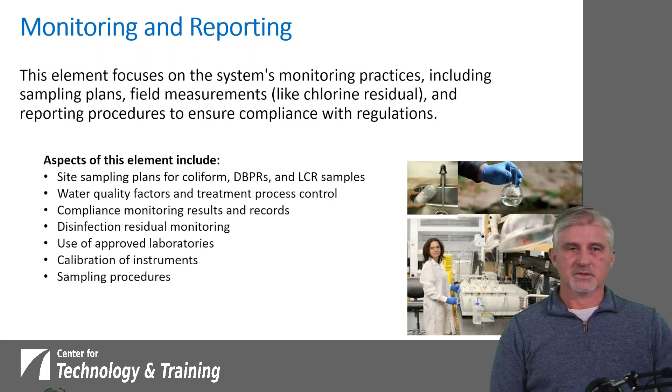So yeah, some of the sampling plans: coliform, DBPs, the lead and copper rule sampling, water quality factors, and treatment process control. That's checking to make sure that your treatment is being done properly through different sampling throughout the treatment chain, submitting any compliance monitoring results and records, disinfection residual monitoring or use of approved laboratories, calibration of instruments if you're doing, could be for residuals, could be for in-house laboratory testing, and what sampling procedures you have.

So poll number 7, which of the following do you think is a tier 1 sanitary deficiency? A, an operator has not attended a training in the last 10 months. B, end of tank overflow pipe is 20 inches from the concrete pad. C, a well casing does not have a sanitary seal. And D, the system is understaffed.

All right, the majority of people have entered their answers, but I'll give everyone just a couple more seconds to get your answers in, and then I'll be closing the poll. All right, closing the poll in 3, 2, 1. All right, Daryl. So the majority of people, at 84%, said C, a well casing does not have a sanitary seal. Okay. And that is the correct answer.

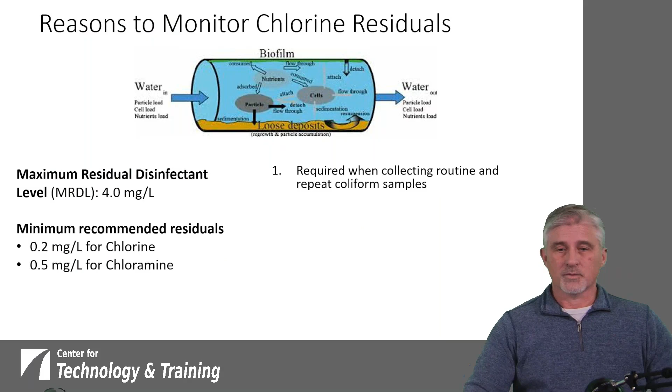And then we also want to maintain a minimum residual out in the distribution system. The minimum recommended residuals here are 0.2 parts per million for chlorine and 0.5 parts per million for chloramine. I would recommend higher than those, but you use this information to make sure that you're operating the system properly. You need to collect chlorine residuals when you collect your routine and repeat coliform samples. So if you're chlorinating and you're collecting those samples, you have to collect chlorine residuals at those same times. The information helps you ensure that you're protecting against the pathogens. If you don't collect the information, you don't know.

You'll be able to be more certain that you're inhibiting the growth of biofilms if you collect your residuals. If you don't have the information, you just don't know. And then it's also an early warning sign if contamination exists, because if you see a reduction in residuals, then it could be because you've got contamination out there. And you want to ensure that you've got a residual of at least 0.2 parts per million in the remote sections and dead ends, so the worst areas of the system.

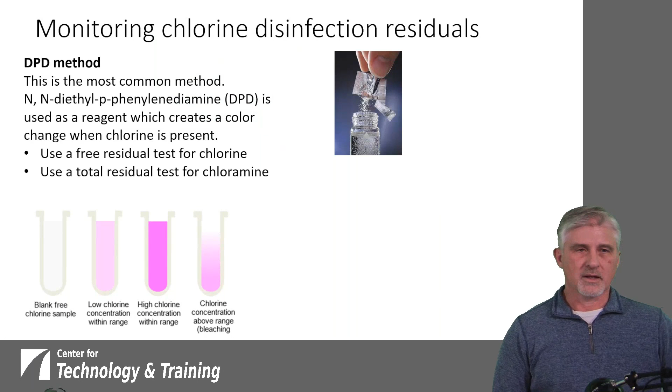We can test for both free residual and total residual. Quite often people will use these little pillow packs. You tear it open and you put that in the bottle. As you can see, there's an example of the pink color that comes out. Those bottles get thrown into a little handheld meter that will provide you with a number, result.

And then the old school way was these color wheels. And so the idea was you would match it up with a known amount. These, I think, are pretty much phased out. I'm sure there's people still using them. The problem with them is that in sunlight, these would fade. And so quite often operators are out there, they throw them on the dash of their truck, and before you know it, they're all faded out and not giving you accurate results.

So I think we said, through time and temperature, there's a lot of things that can affect our chlorine residual. And this just shows kind of a study of a system where they took samples in different months, and they showed just how the chlorine residual dropped. What's typical is that the warmer the water is, you may have higher residuals, but they drop faster than you do with colder water. And if you're looking at, in this instance, a good portion of these at 0.2, that level that we said you should maintain, it was only about 7 hours that it took to drop that much.

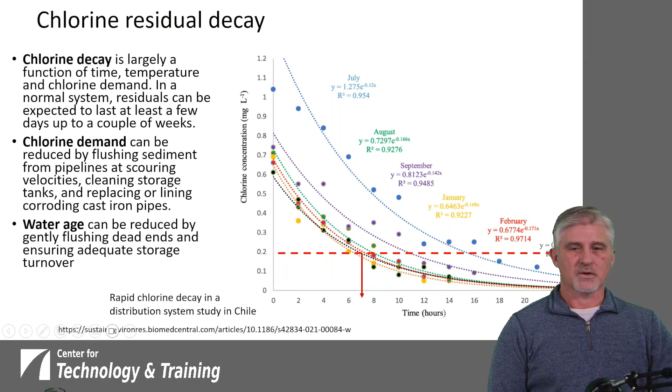This study was done in Chile about rapid chlorine residual decay. And I mean, if within 7 hours you're going to be down to 0.2, that's pretty difficult to operate. So you want to flush the sediment from the pipes, maintain a scouring velocity when you do that. You may need to replace, or line pipes depending on what you've got. Cast iron pipes can definitely eat up our chlorine residuals. And then, the newer the water you have, you can see from this, the higher the residuals. So if we can turn water over and try and reduce water age, that's beneficial.

So this is from a study that was done in Korea, and they were looking at the potential to have to boost chlorine out in the distribution system. As you can imagine, that could be a problem, because the potential for creating disinfection byproducts increases because you're adding more chlorine out into the system. But the darker areas had more chlorine to start with. Here we had 1 part per million as it entered the system, and when we got out into the system, we were seeing at dead ends 0.01 and 0.05, and that's at the point where it's almost not measurable.

So yeah, they did this study to see if they needed to add booster disinfection out in the distribution system. But we can do things. We can flush dead ends. It's possible that booster chlorination is an option, but once again, like I said, the potential for forming disinfection byproducts means you really have to study it pretty hard to see if it was worthwhile.

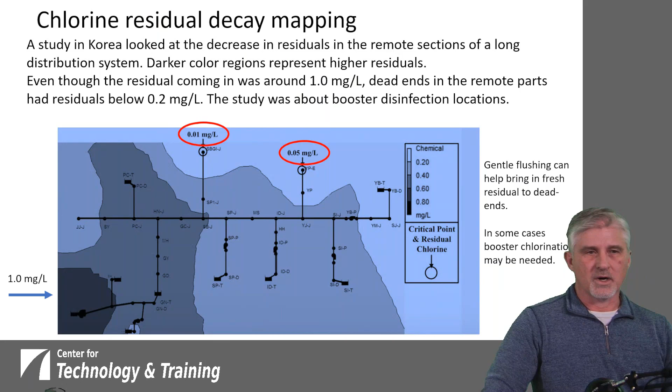Monitoring the pressure out in the distribution system is helpful as well. We want to maintain that pressure of at least 20 psi, 35 psi under normal working conditions, I would recommend. But it helps to avoid those back siphonage and backflow issues that could potentially be out there. Any leaks in the water mains if we have lower pressures. We want to make sure we have pressure for fire flow. And then the higher points in the system, as we talked about pressure yesterday, the pressure is going to be lower at higher elevations.

So we're on to poll 8. Which of the following water quality management practices specifically helps to reduce chlorine demand? A, gently flushing dead ends. B, maintaining pressure above 20 psi. C, ensuring tank turnover of 5 days or less. Or D, system flushing and tank cleaning to remove sediments.

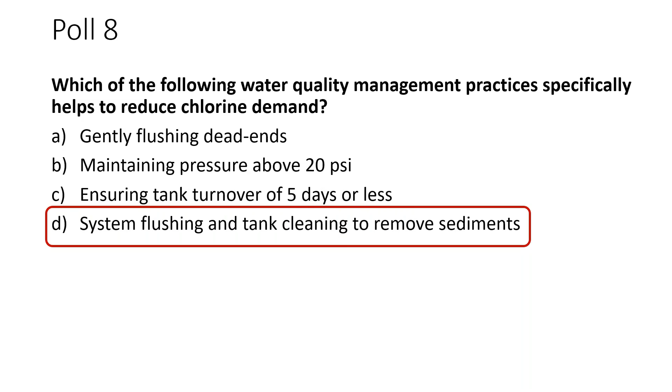So now I want to talk a little bit about the revised total coliform rule. There are two aspects that are most important: understanding the repeat sampling requirements and the required number of samples based on population. If you get a routine positive total coliform, you need to take at least 3 repeat samples within 24 hours from the following locations. You have to collect a repeat at the original site, and go within 5 service connections upstream and within 5 service connections downstream.

And then the Groundwater Rule would also require that if you're a groundwater system, you collect a set of raw water samples from all the wells that were operating when that positive sample was collected, or before it was collected. And the number of samples is based on population. The number of samples required each month is roughly 1 sample for every 1,000 persons served. But we're going to give you a table that'll show more details.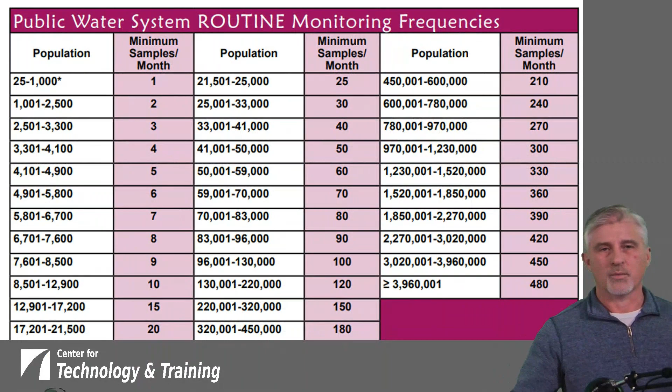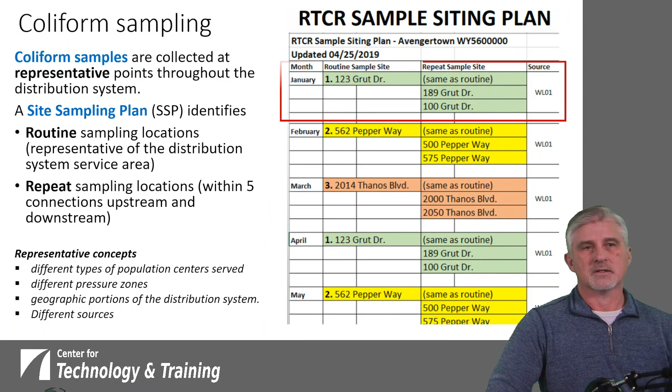We're going to look at this example here to show what we mean by routine and repeat sites. In this case, our routine site is 123 Grut Drive, and our repeat sites are 100 and 189. If we look here, 189 is 1, 2, 3, 4, 5. It's within 5, the 5th location, and that's our downstream in this case. Our upstream is 100, so that's 1, 2, 3, 4. That's within 5 as well. So these are valid sample sites for our sampling plan.

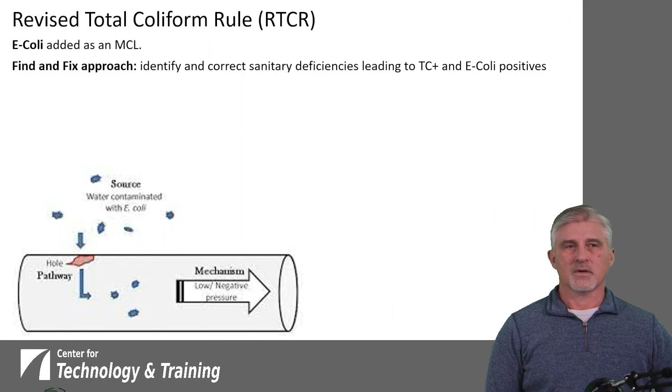Further on the revised total coliform rule: initially we had just the total coliform rule, and then it became the revised total coliform rule. As part of that, E. coli was added as an MCL. So if you get an E. coli, you've got a maximum contaminant level violation. The whole idea is that we're incorporating a find and fix approach. If we've got problems with coliforms, we're going to go out and figure out what they are so that we can correct them, whatever might have led to either total coliform or E. coli positives.

A level 1 assessment puts the onus on the utility to investigate any potential sanitary deficiencies. It is required once there are 2 or more total coliform positive samples in a month if you're a system that collects fewer than 40 routine samples in a month. If you collect 40 or more routine samples, it's required when more than 5% come back total coliform positive.

And then the level 2 assessment is performed by the primacy agency, and that's when the utility has had 2 level 1 assessments within a 12-month period, or you have an E. coli violation. So until you get to that point, it's on the utility to do the investigation. Once you've had 2 within a 12-month period or an E. coli violation, then the state is going to step in and do an assessment.

So the idea is that for contamination to occur, there has to be a source of contamination. There's got to be a pathway for that contamination to enter the system. And then there needs to be a mechanism that causes this contamination to enter the system. And there's an RTCR quick reference guide.

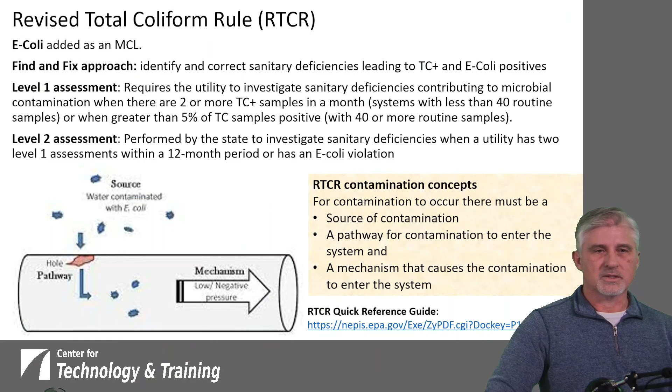Some of the tips for collecting a sample: avoid taps that have threaded spigots. Anytime you've got threaded spigots, there's the opportunity that something is caught on that, maybe something organic or microscopic, and somehow that gets into your water. That's not really representative of the actual water inside the tap. It just comes off. You want to have that tap at least 18 inches above grade. You want to run the water until it cools, so you want to see that temperature change.

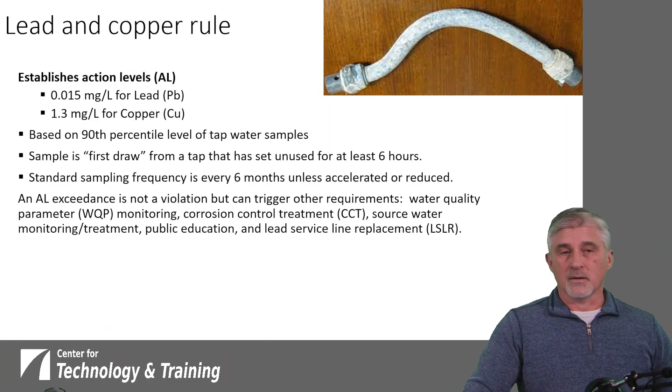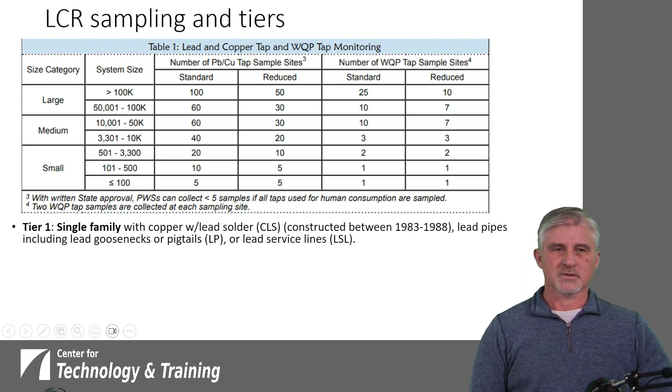So you want to collect those samples ideally from tier 1, which are single family homes with copper with lead solder constructed between 83 and 88, or lead pipes including goosenecks or pigtails and or lead service lines. If you don't have enough to meet your standard or reduced numbers, then you would have to go to tier 2, and you're going to look at all building types, not just single family, with the same set of standards. And then if you don't have enough tier 1 and tier 2, then you look at single family structures that have copper with lead solder constructed before 1983. And then if you don't have enough of those, then you go to basically everything else. So you collect from tier 1 if you have them. If not, you go to tier 2, as many of those. And you move down this. If you don't have enough, you'll eventually get to the bottom.

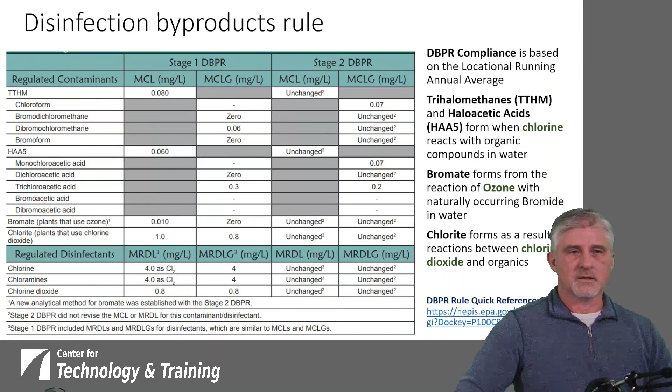So there's a chart also for the disinfection byproducts rule. As I had said, that's based off this locational running annual average, which is a little different. THMs and HAAs form when we've got those organics in the water and the chlorine reacts with it. Now, there are requirements for bromate, and those are for systems that use ozone to disinfect, because if you've got bromide in the water and you use ozone, you can create bromate, which is another thing that's regulated. And then if you use chlorine dioxide, which is another form of treatment, then you can form chlorite. So if you're using chlorine dioxide, you would have to test for chlorite. And there's a quick reference guide for the disinfection byproduct rule as well.

So as you said, compliance for THMs is 0.08 parts per million. For HAAs, it's 0.06 parts per million, and that compliance is based off that locational running annual average. So every location that you test at has to meet that independently. And then how do we determine what these sites are? That was based off of when the rule went into effect or a system goes online, they would have to do this initial distribution system evaluation. And the idea behind that is you're going to look at your distribution system and try to find the places that are most likely to form these disinfection byproducts. And that's where you're going to have to sample. So the idea is that it's the worst case locations.

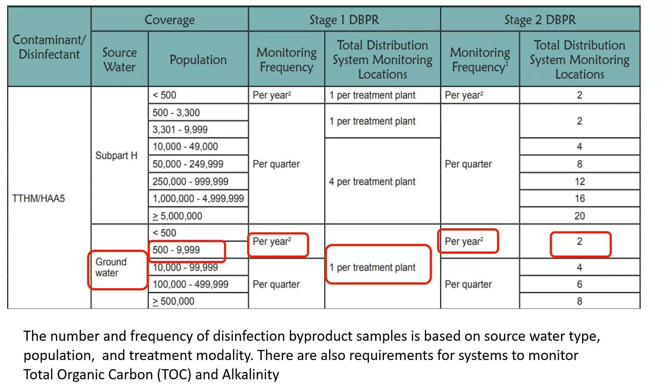So poll 10, what is the maximum contaminant level for total trihalomethanes that is allowed in drinking water?

All right, the majority of people have put in their answers, but I'll go ahead and give everyone just a couple more seconds to get their answers in. And closing the poll in 3, 2, 1.

All right, Daryl, so the majority of people, at 73%, said D, 0.08. All right, well, thank you, Kristen. And 0.08 milligrams per liter, parts per million, that is the correct answer.

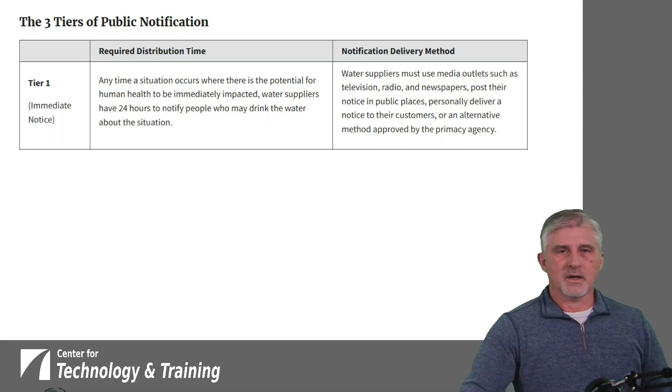So now if you've come up with an issue and you've got to notify the public, there's a set of different tiers that it's important to know. Tier 1 is an immediate notice, and that's a serious situation, a potential for human health concerns. You've got to notify the public within 24 hours. And usually it's the stuff that goes over the radio, the television, in the newspapers, that kind of thing. It's very urgent. Tier 2 is, we exceeded a standard. We had an MCL violation, but it's not anything that is an immediate concern for the public. You've got to notify the public within 30 days, and that could be via media posting or through the mail.

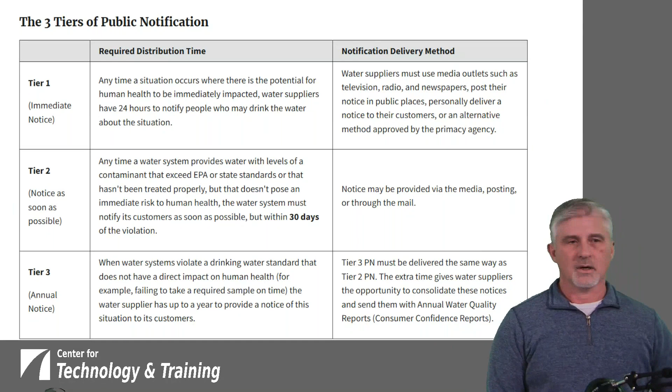And then Tier 3 is the least restrictive. That's annual. It's a standard that doesn't have a direct impact on human health. You're given up to a year to provide that notice. Tier 3 should be provided in the same way as Tier 2 public notices, but quite often it's helpful that people can just include these Tier 3 notifications with their annual water quality report or consumer confidence report, whatever you call it. So what are the 10 different elements of a public notice?

You have to describe the violation that occurred, including the contaminants and the levels. When did it happen? What are the potential health effects? And there are lists of those you can go and find. Who's the population at risk? You know, are there any particular people, babies, different things like that? Should they find a different source of drinking water as part of this? And what's the system doing to fix the problem? Any actions that the customers or consumers can take, and then when does the system expect to have the problem resolved?

You need to put information on there as to how to contact you for more information. And if you've got a non-English speaking population, you may want to put it out to them, and you also want to have people share it with people who may not normally get the public notice. And there's information on that.

Tier 1 notice is required as soon as practical, but no longer than 24 hours after you learn about the violation or situation. And those are typically things like E. coli or fecal coliform violations, nitrate or nitrite MCL violations. We talked about that earlier. Chlorine dioxide maximum residual disinfectant level violations. If your surface water plant exceeded your maximum allowable turbidity level, that would be one.

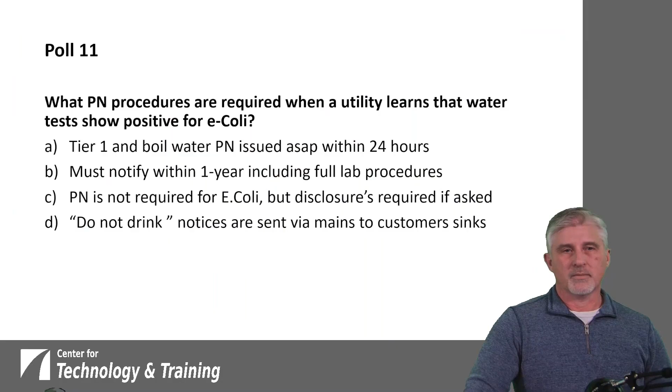And then our final poll: what public notification procedures are required when a utility learns that water tests show positive for E. coli? A, Tier 1 and boil water PN issued ASAP within 24 hours. B, you must notify within 1 year, including full lab procedures. C, a public notice is not required for E. coli, but disclosure required if asked. Or D, do not drink notices are sent via mains to customers' sinks.

Right, that one was answered very quickly. But I'll give everyone just a couple more seconds to get their answers in. Closing the poll in 3, 2, 1.

All right, Daryl. And 98% of people said A, Tier 1, and boil water PN issued ASAP within 24 hours. All right, thank you, Kristen. Yes, I'm glad that everybody answered that, because that is the correct answer. Obviously, it'd be interesting to see do not drink notices popping out of their sinks. That would be a funny one.

So what do we cover today? Disinfection, dosages and feed rates, disinfection byproduct prevention, sanitary surveys, sampling and monitoring. We've got these takeaways. We want to keep in mind water age management, what our sampling and monitoring practices are. Disinfection is a very important thing for water system operators. And we want to thank you for participating.